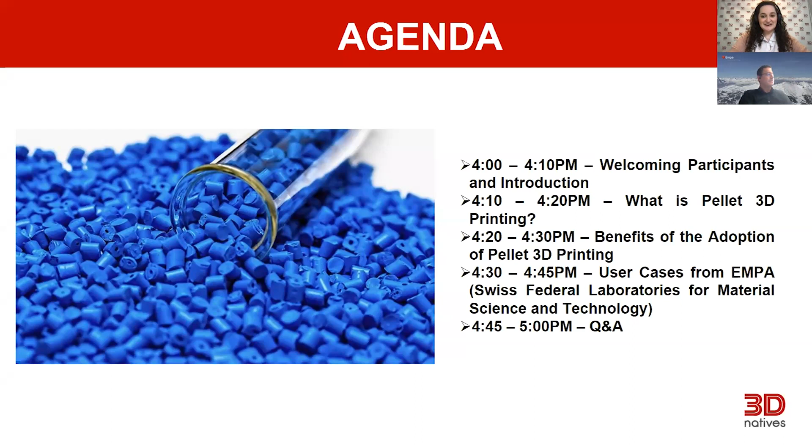So here we have the panelists. First, I would like to introduce you to Mr. Zoltan Mayas, who is an international expansion project manager at Tumaker. He has more than 20 years of frontline B2B business experience in international sales and marketing, and has studied management, sales and marketing at a university level, and he also holds a degree in digital and social media marketing, as well as a master's degree in international business and life coaching. He has created several successful international sales campaigns, developed strategies, and led sales teams. Additionally, he has managed industrialization and sales expansion projects and opened new markets in several countries. Since 2021, he has been in charge of the internationalization of the Tumaker brand as a country manager.

Also from Tumaker, we'll be joined by Dr. Toni Iborra, who is a project manager and materials specialist, who graduated from the University of Valencia with a degree in chemistry, with stays at the University of Manchester in the UK and Pontifical Catholic University of Argentina. He began his research career at the University of Southampton, where he obtained his PhD in chemistry for his research based on materials with photocatalytic properties, and where he also carried out teaching activities. He has presented his work at national and international congresses, including at the University of Oxford and EMRS Strasbourg, as well as published peer-reviewed articles in first quartile scientific journals. He is a lecturer at the Francisco de Vitoria University and professor in chemistry at Florida State University, teaching chemistry 1 and 2, as well as experimental lab. Since 2021, he has led the commercial strategy and positioning of the Nova Spider project at IT3D Group as an expert in the field of material sciences.

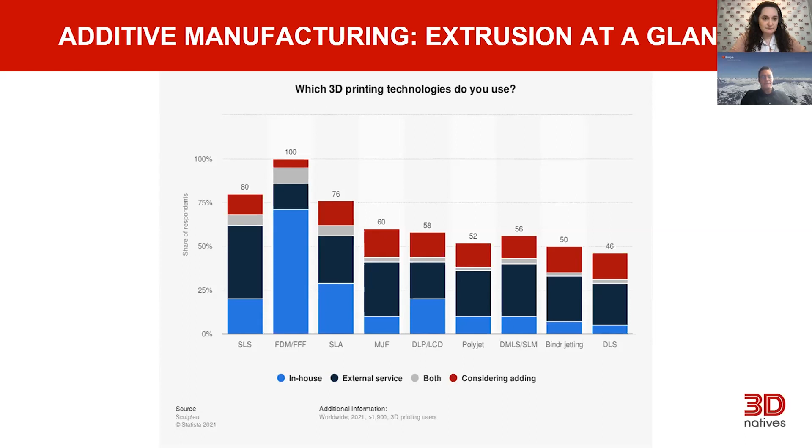But I just wanted to take an opportunity to take a closer look at the processes that are used. For those who don't know, on the graph on the screen you can see the many different processes used in additive manufacturing. By far, one of the most popular are extrusion methods, called FDM and FFF here. There are others that hold the extrusion name, and in this graph from Sculpteo, they showed that the vast majority of companies adopting additive manufacturing are adopting it through extrusion rather than other methods for a number of reasons, including cost and ease of use.

That being said, when you think of these industrial projects, often extrusion isn't what comes to mind. Instead, it is other processes. This is where a technology like pellet 3D printing comes in. Thanks to pellet 3D printing, users would be able to use a wider variety of industrial printing materials at a cheaper cost and faster than with many other methods. This could really help push industrialization in the AM sector, allowing it to become even more securely a method for manufacturing through a variety of fields.

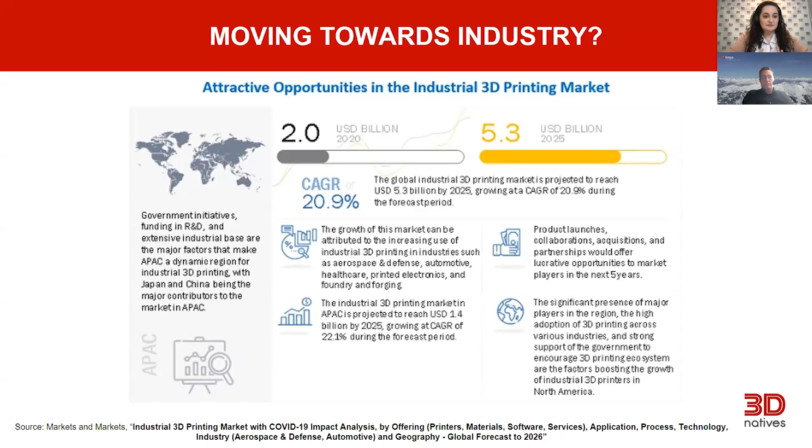Madeleine, thank you very much for the fantastic introduction. I also would like to welcome everybody. I would just cut right in the middle of what we're going to talk about today. I'm looking forward to a nice hour spending together talking about pellet printing.

So, as we saw in your introduction slides, the most popular manufacturing technology is extrusion. So what is pellet printing? Well, it's not very difficult to explain. Pellet printing is when we're printing using pellets. We can call it FGM, fused granulate modeling, or direct extrusion printing.

Something I wanted to say is that every filament starts as a pellet, as filament manufacturers use pellets to make filament. So in essence, printing with pellets is jumping one step in the material chain. Printing using industrial pellets, or almost any type of plastic waste converted to pellets, allows that possibility that no other technology did before.

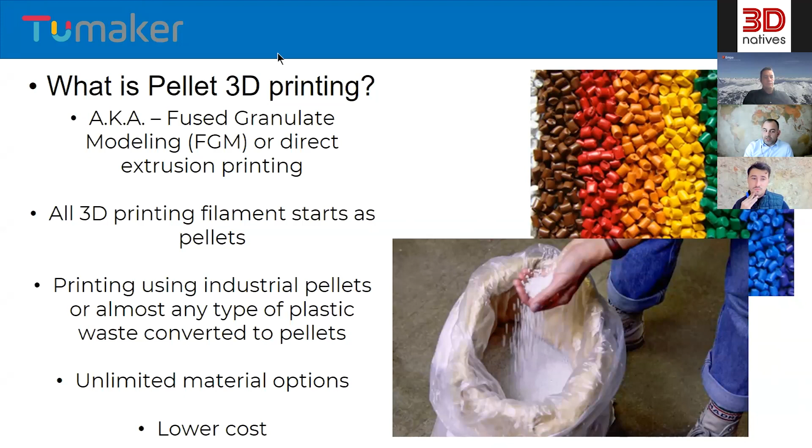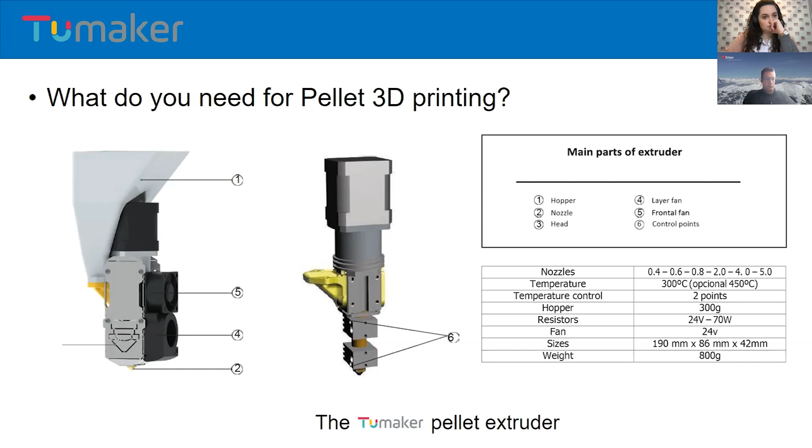Frank will be talking a lot more about extruders, so I would just leave it at that point. A couple of things with Tumaker: the extruders we are fitting to our printers go up to 300, 350, optionally up to 450 Celsius, giving additional possibilities with materials of higher melting points. And obviously these are developed by us and are specific extruders for pellet printing.

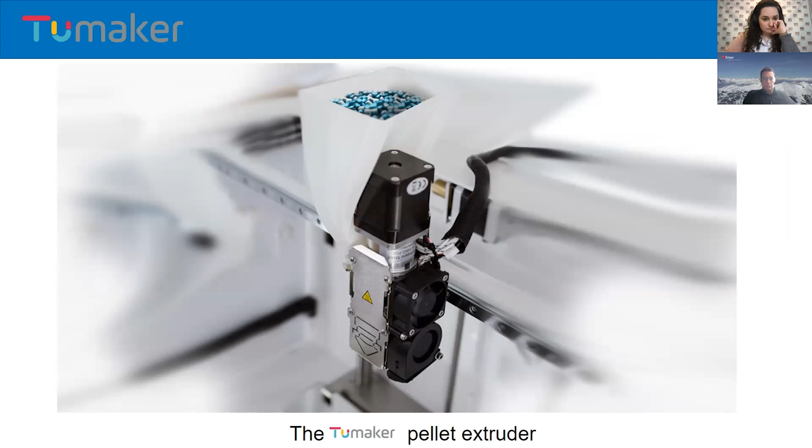So let's move on to the next slide, Frank, if you can. Here's a picture so you can see a pellet extruder in action. Like I mentioned before, there's a pellet hopper on top of the extruder fitted to the 3D printer. Let's move forward - another picture, filling manually the pellets into the extruder while the machine is printing.

So, as I promised, a bit more on reasons - cost and materials using pellet printing - and those were the reasons why Tumaker decided to start focusing on pellet printing. One of the most important, or the first that comes to mind, is the freedom of choice of material. You could use a wide array of materials there, up to 350 degrees. The second would be limitations in the development of new materials.

We work with a lot of customers who want to test and try out new materials. Pellet technology makes that a lot more easy and convenient, and eliminates the need of creating filament from those materials. I also listed advanced technical materials, custom composites, and adding dyes and additive fibers. I'll leave all that to Toni - he knows a lot more than me about this. So we'll see a lot more information in the material section of the webinar.

The fourth point, materials in the filament process can lose or transform part of their properties. That can also be avoided if you directly use the pellet.

Certification on materials, as Toni will mention as well, allows you to work with approved materials for different industries, which is a challenge for many.

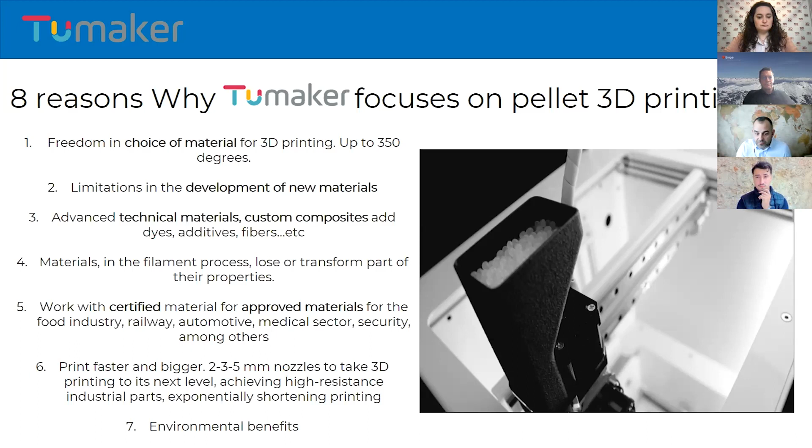The seventh was environmental benefits, as pellet printing makes it easier to use recycled or remanufactured recycled material. It's simply more practical. As you might see, the title says 8 reasons - I have 7, so the 8th went to the next slide because it's slightly important for many.

The cost of printing obviously depends on the material you're using, but it's estimated at 60 to 90% savings on printing cost per kilo, depending on the type of material you use.

Here's a quick comparison, the source from 3DX Tech, comparing PETG and Ultem pellet pricing. I think there's no rocket science here - pellet is lower cost material because we're skipping one step in the process of preparing material to be printed with.

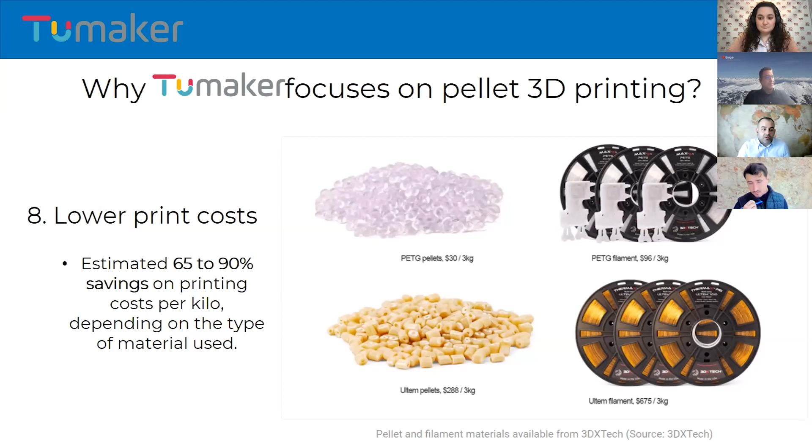So at this point, some of you might be asking, who's Tumaker? I just wanted to give a couple of quick facts about the company. We're building performance-focused industrial-grade 3D printers since 2014, always focusing on prosumer industrial-grade machines. We have in-house manufacturing capabilities in the north of Spain.

We tailor-make size and custom extruder combinations. We work on projects with companies in terms of specific size, specific number of extruders, up to 4, and I'll discuss a bit more about the different head combinations available. We are the first to market with pellet printing technology, bringing it to the desktop aimed at prosumers, and we work with partner training programs and specific solutions for customer needs.

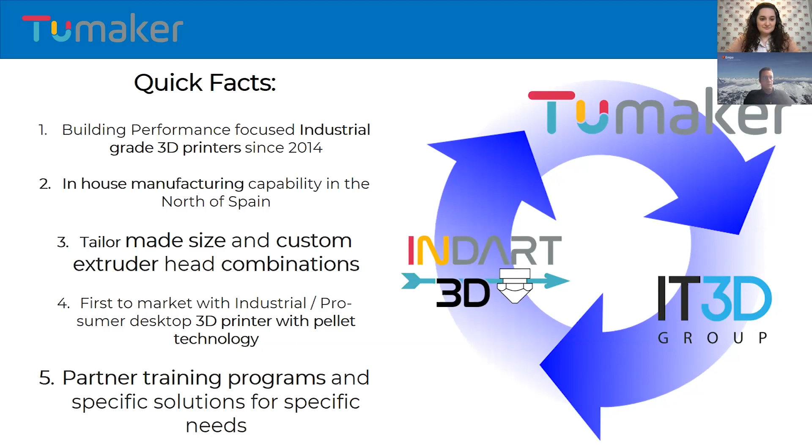The available models: we have the NX, which is the smaller one with a printing volume of 290x180x200. That was the first smallest machine we fitted with pellet extruders.

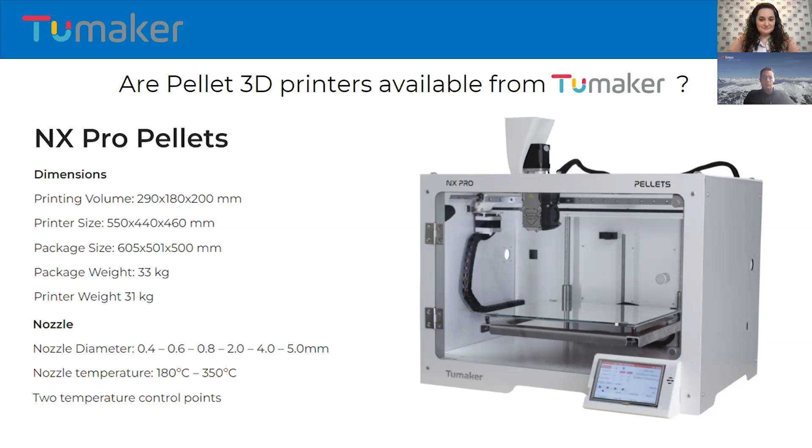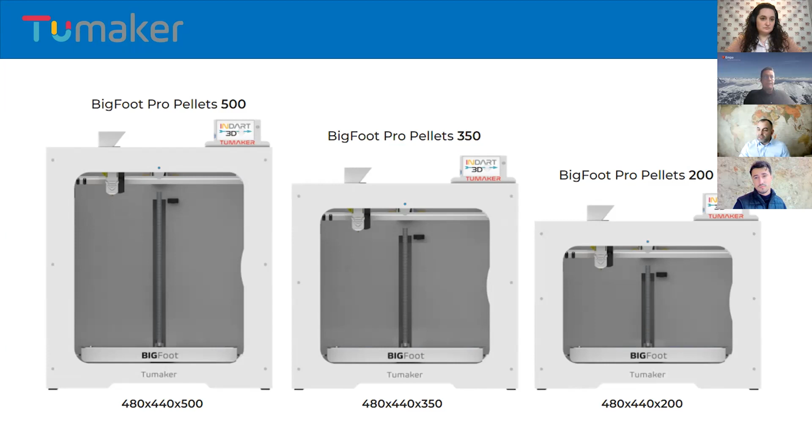Our best-selling range, the Bigfoot range. These are basically different in size - 200, 350, and 500 in terms of height. The mechanics and the build are the same. They are all built with pellet heads. They can be IDEX, independent dual extruder systems. As I mentioned before, we can do custom sizes and custom number of extruder heads fitted on the Bigfoot Pro series. And the possible combinations, which I believe is unique in the sector.

We can combine different extrusion technologies in the same machine between Bowden, direct drive, and pellets. So you could potentially choose a dual extruder where both are pellet, or do direct drive and pellet, which is quite popular, using two different materials - one for support material, one for building materials. Combining these three extrusion technologies, 6 possible mix and match combinations are available in our Bigfoot range.

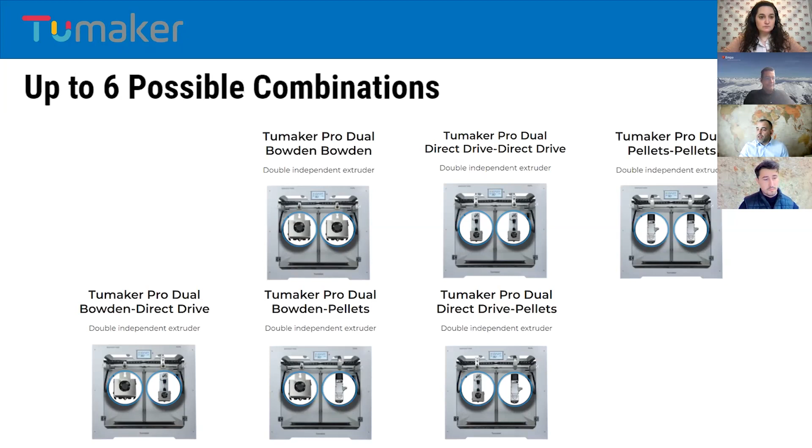So this I think sets the tone for the rest of the panelists on the webinar. They will go into more depth in terms of materials and technology, so I would leave the screen for my colleagues Toni and Frank. Thank you very much.

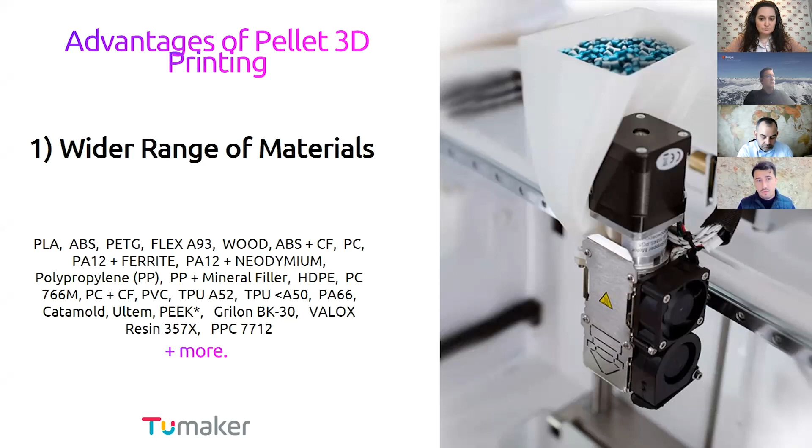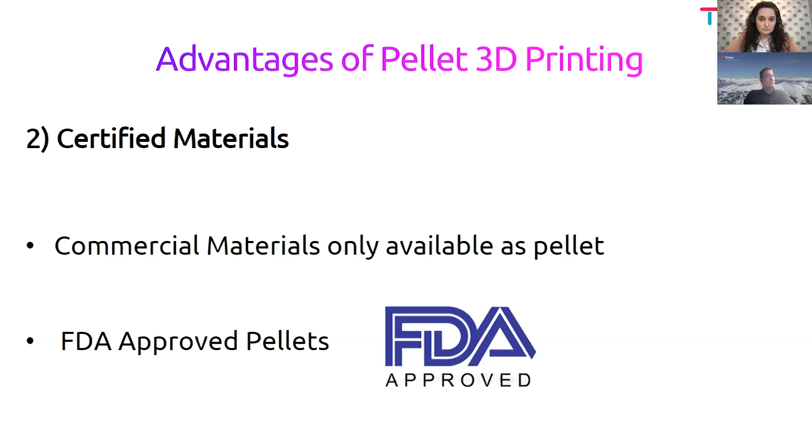Among these pellets, we can highlight certified and also FDA-approved materials for fields such as tissue engineering or the biomedical sectors, where the use of FDA-approved medical grade, biocompatible materials is required, and currently they are only available as pellet.

There is another advantage we can highlight, which is high flow and deposition rate. The pellet feedstock allows for much higher deposition rates, so we can print bigger volumes, bigger parts. However, as the build rate increases, the ability to achieve the desired geometry and in some cases the surface resolution can decrease.

At Tumaker, we typically work with pellet extrusion nozzles ranging from 0.4 millimeters to 5 millimeters in diameter. With large deposition nozzles, large amounts of material can be extruded, allowing for more material output from the extruder and therefore increasing the build rate.

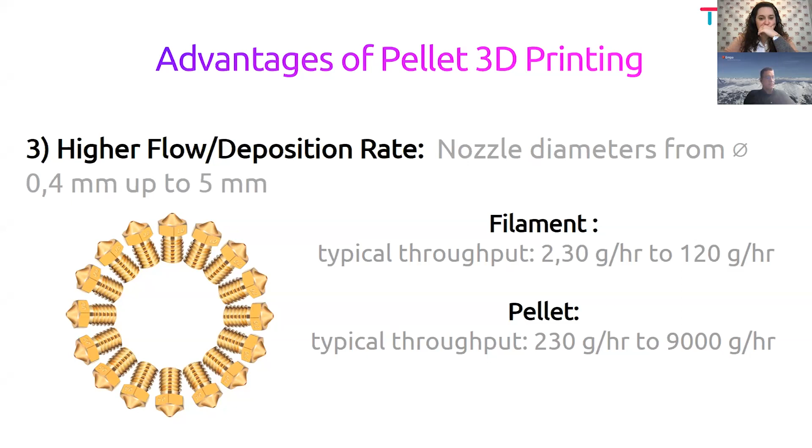Another advantage, probably the main one, is lower printing costs. Both filaments and pellets start out as pellets in 3D printing thermoplastics. Filament materials are made by heating pellets and forming them into filament. Using pellet technology, we skip this process, so we have one less heating cycle, which potentially means the pellet thermoplastic will process easier, perform better, and cost less compared with filament.

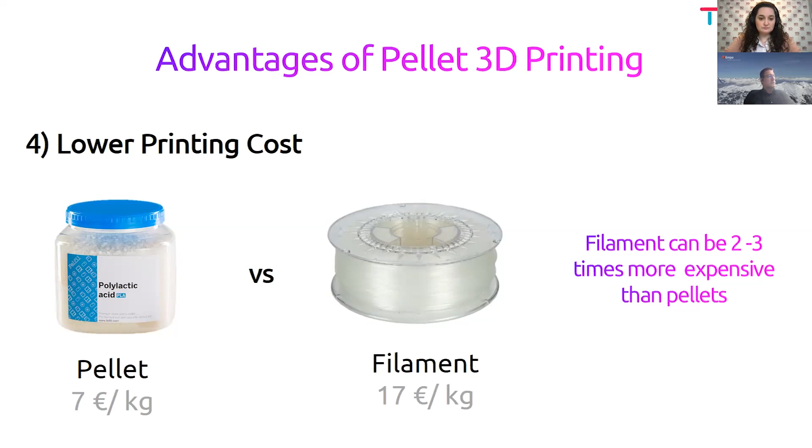Another advantage is bigger prints. Because of the lower throughput and high resolution, filament printing tends to be used more for smaller parts. It's true that bigger parts are also possible using filament 3D printing, but it might not be economical or efficient. On the other side, pellet printing tends to be used for larger parts, bigger volumes that can benefit from its faster throughput.

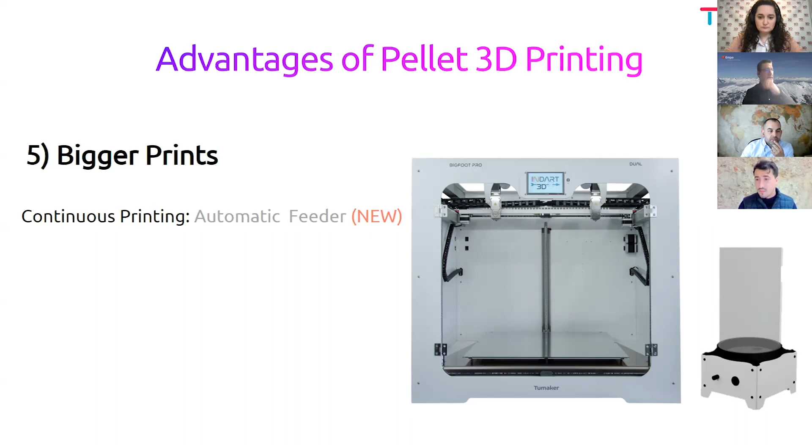Additionally, during filament 3D printing, we always have to make this technical step of changing the coil. This is something we can avoid using pellet extrusion because we have an automatic feeder that is continuously feeding the pellet extruder.

Another advantage is that we can have multi-material 3D printers. We can combine up to 4 different independent heads, combining pellet extruders with the incorporation of bowden and or direct drive heads, allowing for the combination of pellet extrusion with filament extrusion.

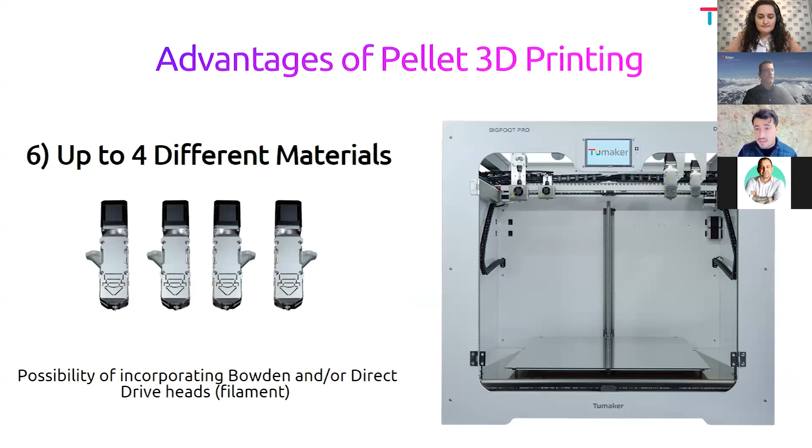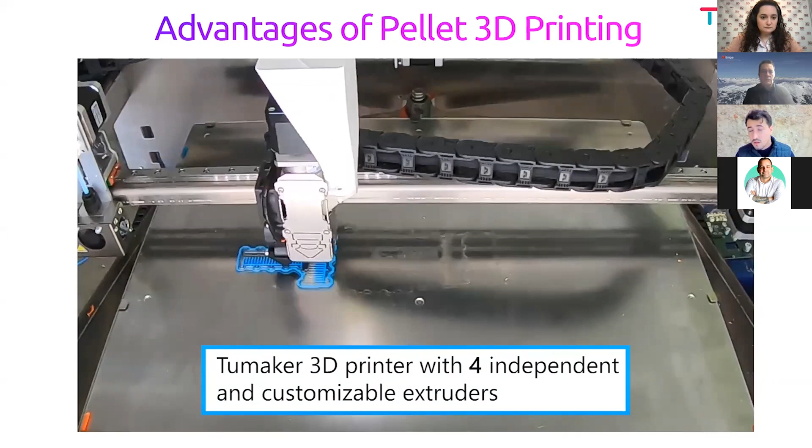In the next video, we'll see one of our machines working. This one contains 4 extruders, 2 of them pellet and 2 of them filament. The first one prints the outer part of the structure using filament 3D printing. Then that same structure is filled using a pellet extruder with a different polymer at a different temperature. Then the same head prints a second structure's outer part, and another pellet extruder deposits a different material compared to the other one.

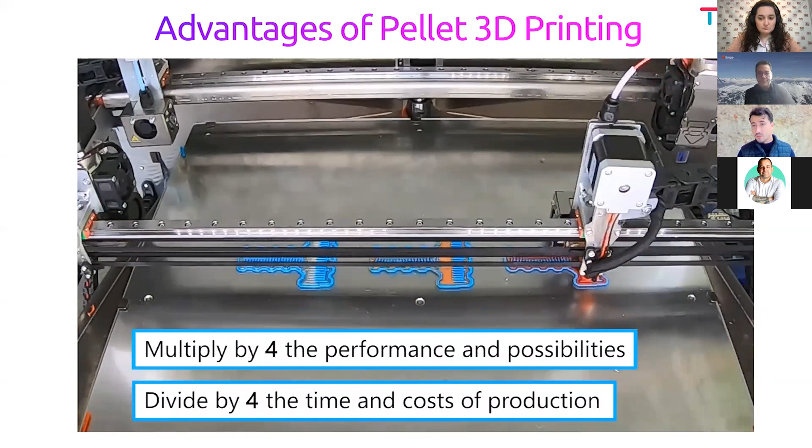Finally, a third structure is printed, the outer part always with the same blue polymer, and then it's filled with another filament. So we have 4 different materials, 4 different extruders, and 4 different temperatures.

So which sectors can benefit from this pellet technology? We have the biomedical sector, tissue engineering, drug delivery, and energy storage.

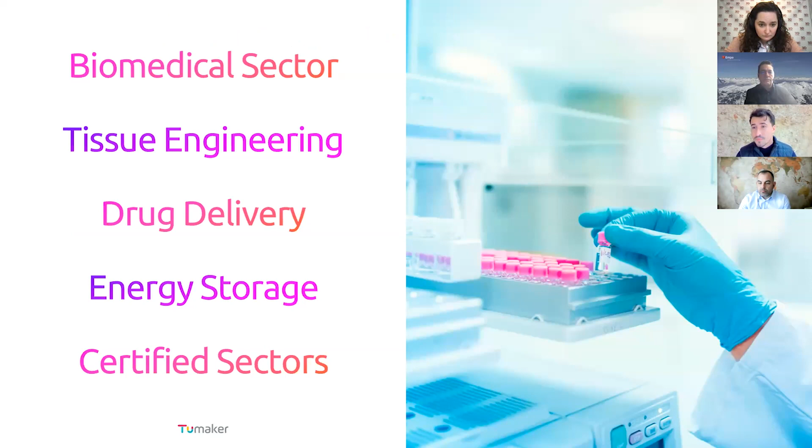We also have certified sectors, as well as railway, mechanical engineering, prototyping, and automotive and aerospace.

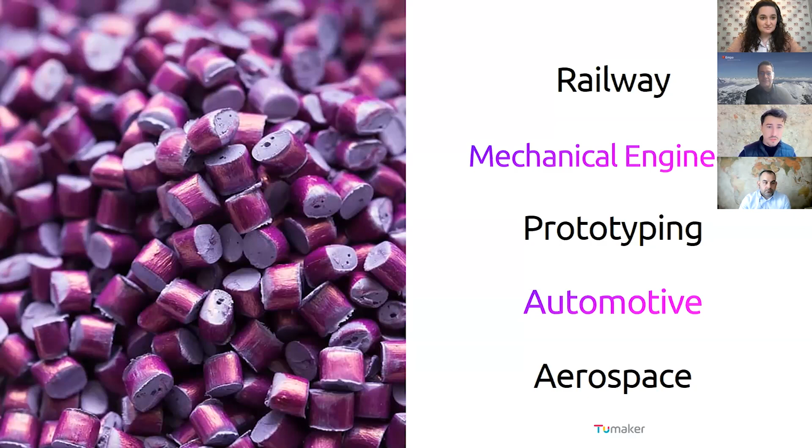As previously mentioned, for the biomedical sector, medical grade FDA-approved polymers such as polycaprolactone or polylactic acid are required. This can be used to fabricate scaffolds using different blends that contain active biomolecules such as antibiotics, in order to treat different pathologies or infections.

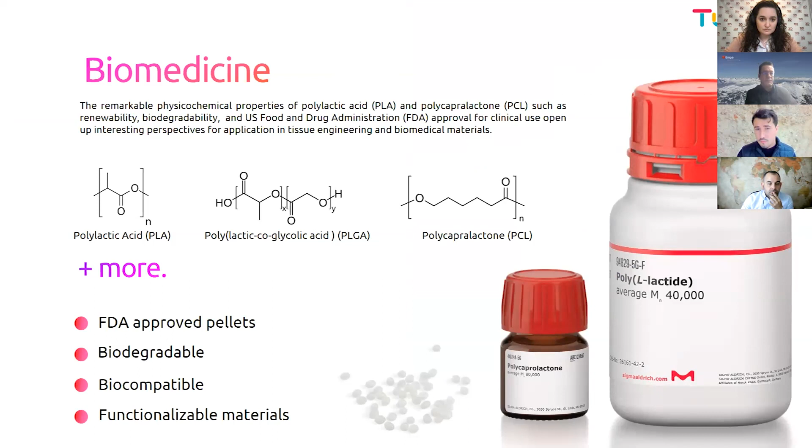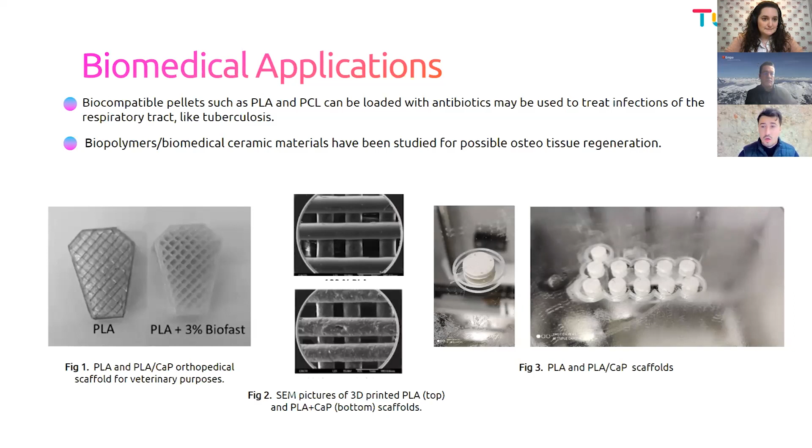Also for the mechanical engineering field and prototyping, the validated pellets include many performance-matched grades to provide application-specific property profiles. For example, Valox pellets, PBT plus polycarbonate, combine heat and chemical resistance as well as outstanding electrical properties.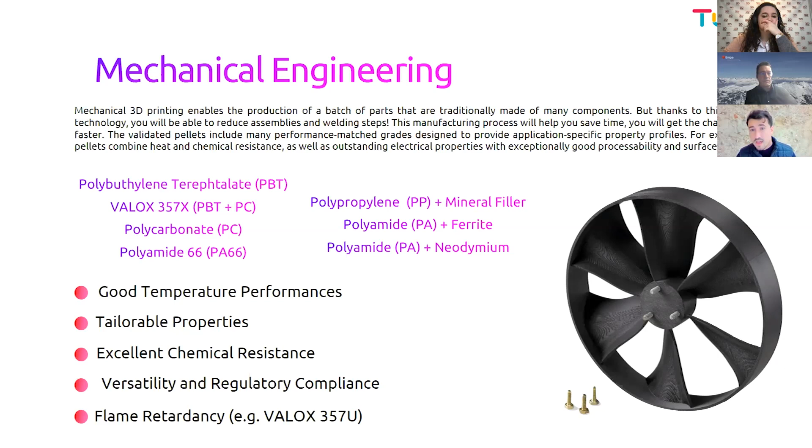Other fields that can benefit from pellet technology include prosthetics, which can be made using polymers that are functionalized and can have antimicrobial properties, such as silver or copper nanoparticles.

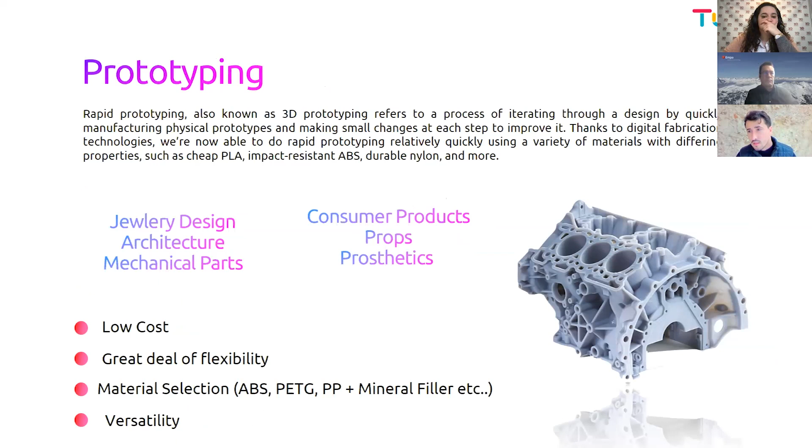The customer or researcher can fabricate their own custom material blends by combining different pellets. You can easily add dyes, additives, or reinforcement fibers to the mix to create custom-made composites.

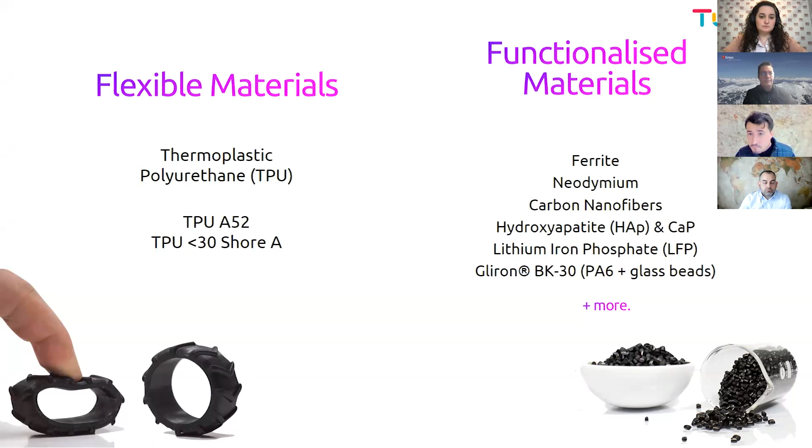Another interesting sector, which Dr. Clemens will also go into detail on, is that we can use pellets loaded with a relatively high percentage of ceramic materials or metals. This can be extruded to obtain ceramic and metallic structures after post-processing, which basically consists of removing the organic matrix and sintering, which leads to the corresponding ceramic oxide or metal.

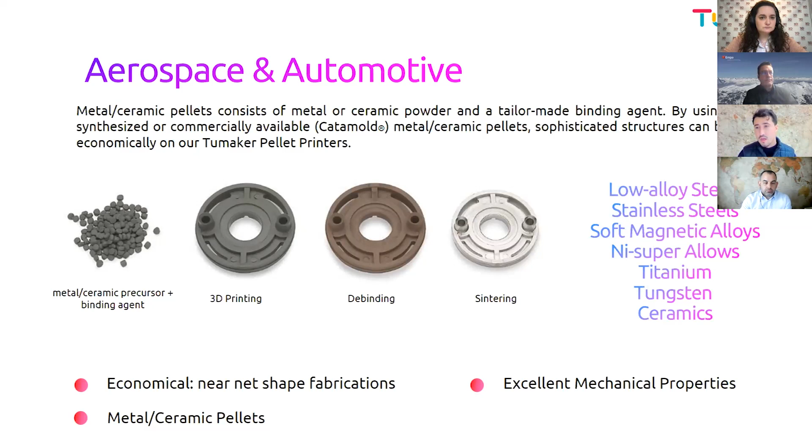So that covers all the advantages of pellet printing for some applications. Thank you very much for joining us.

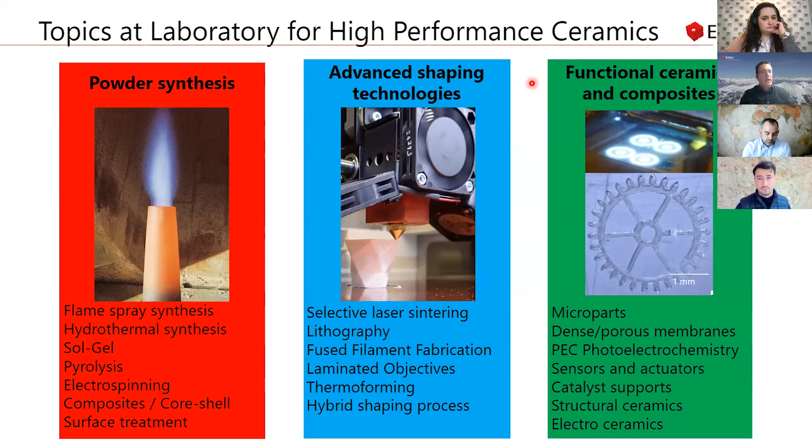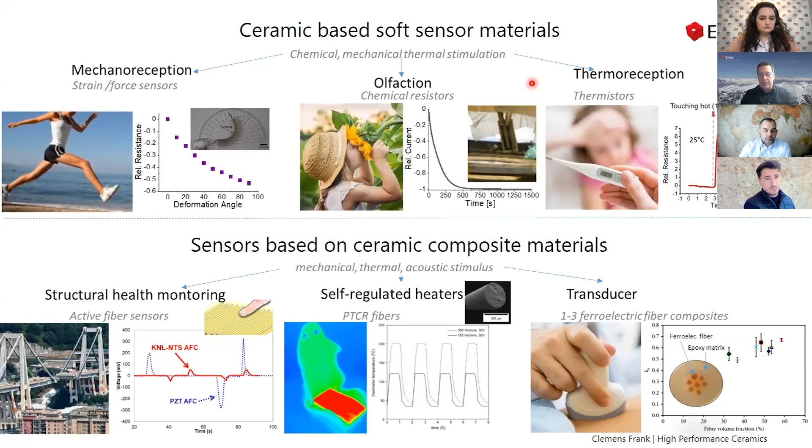My group is split into two parts. On one hand, my group is developing soft sensors based on an elastomer, where we include inorganic fillers which give functionality inside the elastomeric matrix. The second part is that we work on ceramic sensors, which we can use for example for structural health monitoring, self-regulating heaters, or transducers.

Let me now start about the screw extruder for material extrusion additive manufacturing and where we see the advantages. First, material extrusion additive manufacturing, as it's called nowadays—some of you know it also as fused deposition modeling or fused filament fabrication.

We can typically work with four types of different extruder heads. One extruder head is based on air pressure or a syringe, where we press a paste through a nozzle, building up layer by layer to construct our 3D model or 3D object.

The other possibility, if I'm not using a paste but more of a thermoplastic, is to use a so-called Bowden extruder. This Bowden extruder typically has the gears at a different place from the printing head. This makes the printing head lighter, allowing faster and more precise printing. However, the filament has to go through a polymer tube before entering the printing head, which can sometimes be a problem when working with very soft materials.

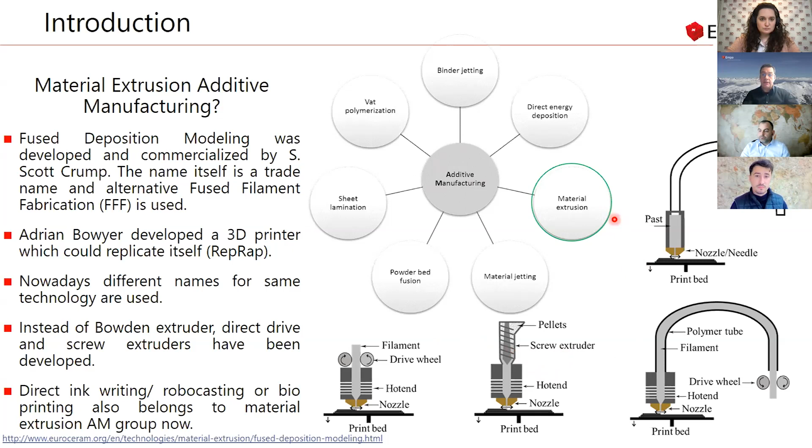So very often the question is, which technology is the right one to use for different materials? Here is an overview of the 4 different printing heads and their main advantages. For the pellet extruder, the main advantage is when you want to work with high printing speeds.

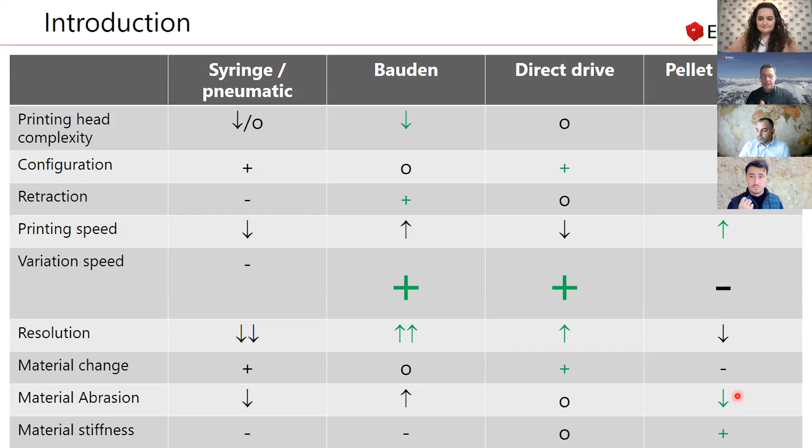Also when we talk about material abrasion, and when you have materials with very low stiffness, for example elastomers. When I'm talking about material abrasion, this means that when you have a very brittle filament, the gears normally rupture your filament, and this is called material abrasion on the filament.

So here you see a view of a screw extruder where you see the hopper, and the screw, which brings the material through the nozzle where then the material goes through.

The idea the people had when developing this kind of system was to mimic what has already been explored for multi-component injection molding processes, where for example you can print toothbrushes with soft parts and rigid parts already together. Typically those devices are printed in one shot, so you can combine soft and hard materials.

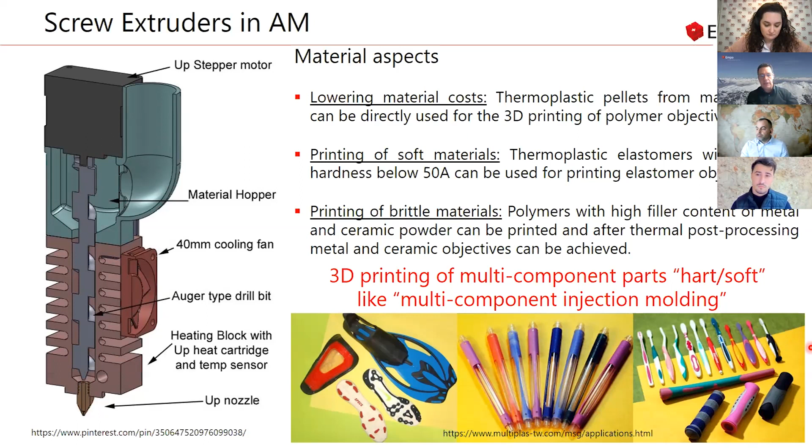It was already mentioned that there are other advantages. What I would like to show now is two cases where we see that the screw extruder has really high potential, and we can use it to further develop new structures and new parts using this kind of technology.

So the first case I'd like to look at is soft materials. As the name says, these materials are soft and have high flexibility. Unfortunately, they also have a high Poisson ratio, close to 0.5, which means that when I push from the top, the material tends to bulge.

By this, for example, it will block directly inside the Bowden extruder. Another problem is when you work with a direct drive and push from the top, you get this kind of buckling. The stiffness isn't enough to really transfer the load needed from the filament, which has to work like a piston pushing the material through the hot end. These are the main reasons why filament printers have a huge limitation here, and that's why the screw extruder can take over these materials.

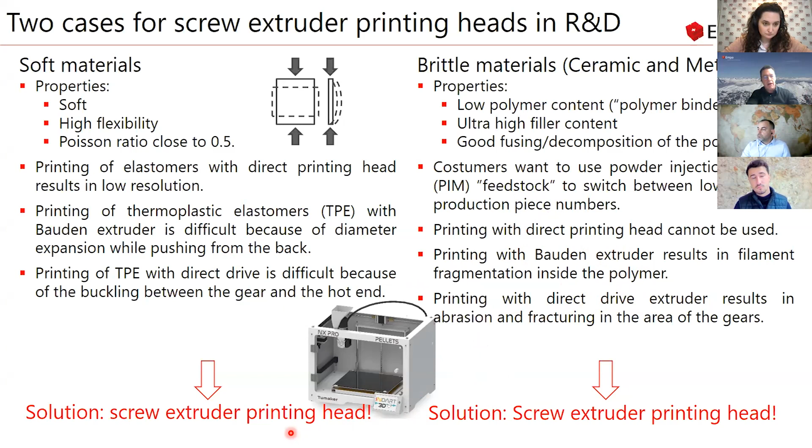With a direct printing head, this clearly cannot be used. Same with a Bowden extruder, and also with a direct drive extruder, the problem is that these materials are typically so brittle that they will fracture or have high abrasion at the area where we have the gears. So these are two material classes where a screw extruder printing head makes sense from our perspective, and where we already use these materials.

Here you can see a little bit of the work we've already done in the last years. This is, for example, a pellet extruder we have here. With this pellet extruder, we first printed some discs. You can see here the bottom layer, which is quite smooth, while the top layer is a little bit rougher.

We used 4 different binder systems and made a ceramic feedstock out of it. You can see that 2 of them were able to print. The other 2 have more waxes inside, so when we start to print with these print heads, we get a phase separation and the waxes separate from the feedstock. However, interesting results came from these 2 feedstocks which we made ourselves with a commercial injection molding binder system.

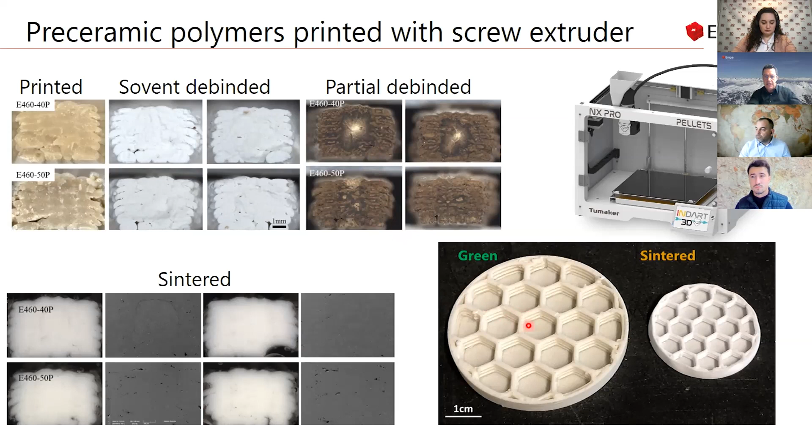Here you can already see some ceramic parts that have been printed successfully for different applications. You see some small parts, parts for the watch industry, and implants that were printed. You can see they were printed with a support material, and you can also see that you can print very large structures based on this additive manufacturing technology.

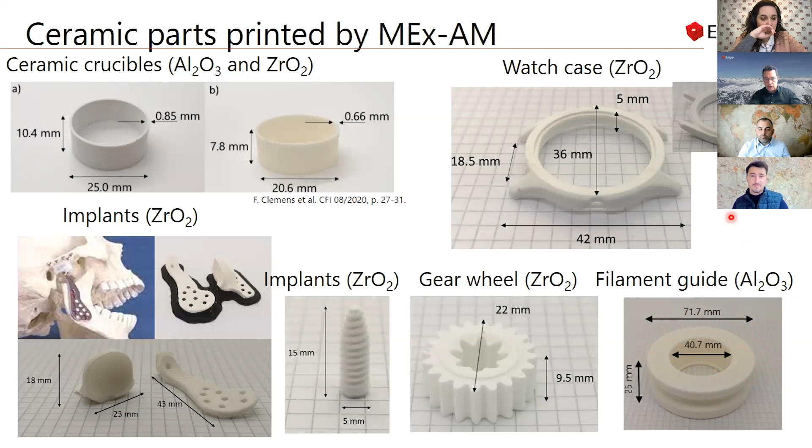We published this already last year in Extruders, where we also introduced a sensor inside. With these multi-material printing heads available nowadays, you can already integrate sensor materials inside. That means you can go one step further and print chemoresistive, thermoresistive, or mechanoresistive materials onto soft materials, and investigate the deformation of the structure or its temperature.

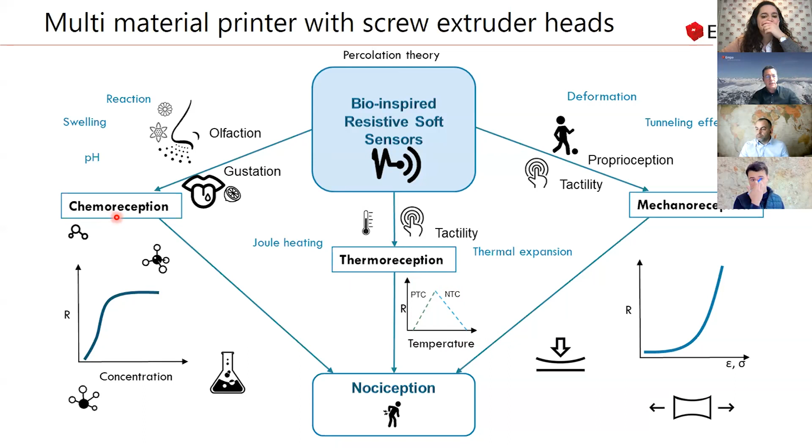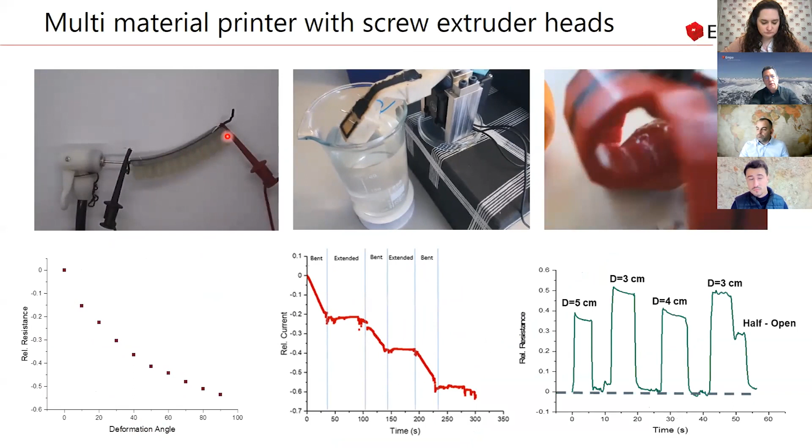This is what I would like to show you here inside these three videos. So you see here one example for this pneumatic actuator, where you see that resistance changed by changing the deformation angle, which you can measure with this special piezoresistive strain sensor on top of it.

The other possibility is that you can measure, for example, here the solvent. That means you measure the vapor of the solvent, which is above the liquid. And you see when we bend it and extend it, then we bend it and extend it, you see that the current always goes down because the concentration above this liquid increases over time.

But you can really nicely see that when we always go close to the surface of the liquid, we always have a huge decrease of the current, which means we can detect nicely the chemical species inside.

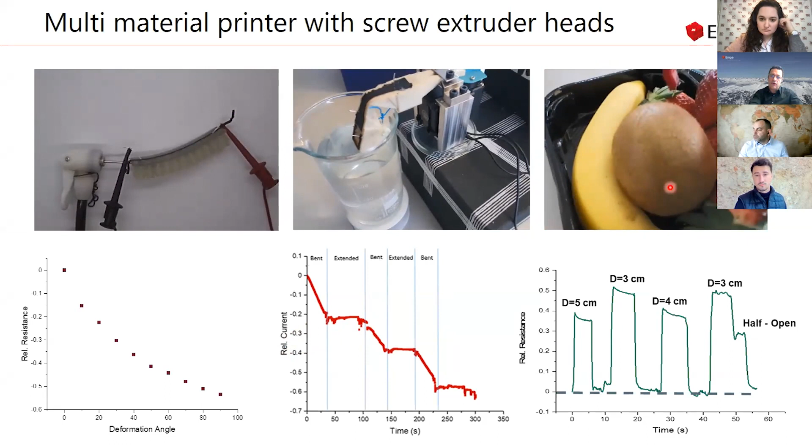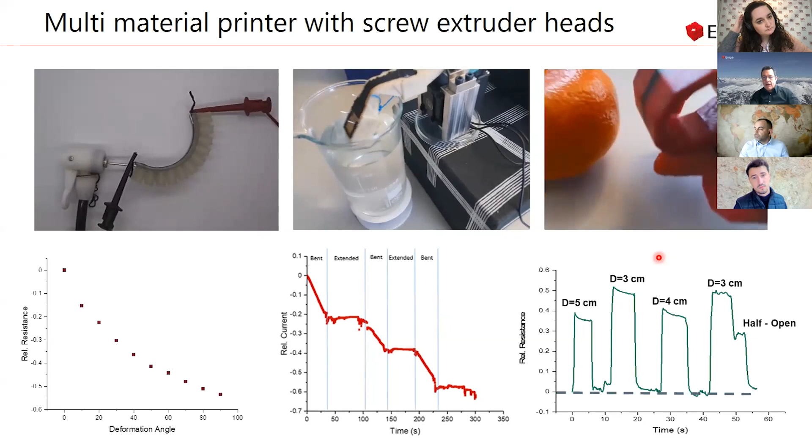And the last video, which you can see here, are these kind of soft grippers for fruit. You can see that by these strain sensors, which are printed on the side of these grippers, you can detect different sizes. So when you have different fruits, you can really select them and place them at different places. These are the applications which you can do with this kind of new technology which is now available.

So let me conclude my part with it. I wanted to show you that you should now use not anymore the words FDM and FFF. You should talk about material extrusion additive manufacturing.

And there is also the screw extruder printing heads, which belongs to this additive manufacturing platform. The interesting part with the screw extruder printing heads is that you can print materials that are not able to be printed with other kinds of printing heads. One example I tried to explain is the commercial ceramic injection molding feedstocks, which you can nicely print with this kind of screw extruders.

However, take into account you cannot use all kinds of ceramic injection molding feedstocks or metal injection molding feedstocks. So you have to look a little bit at what is their composition, because fusing you need anyhow during the printing process. Therefore waxes might be a little bit of a problem as far as we see at the moment.

So another part which I showed you are the soft materials, and this is really a big challenge which I see, because I have not seen so many printers which are able to print a shore hardness below 20A, and I only can see that these can be done by these kinds of screw extruder printing heads, where we have the possibility to even go lower.

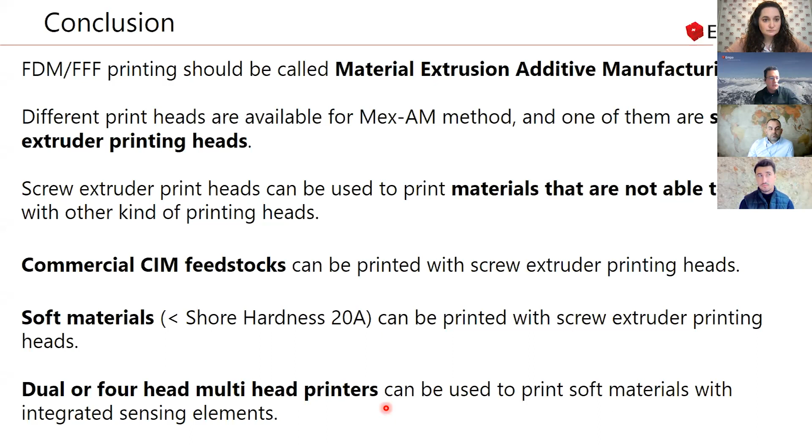Finally, the nice thing is that we have now also the possibility of dual or 4-head multi-printing. That means we can integrate soft materials, we can integrate sensors, plus we have the possibility that we can also print support material, and therefore we can really make very complex structures for soft robotics, medical, implants, or prosthesis, or any kind of other applications which are a little bit more complex than this.

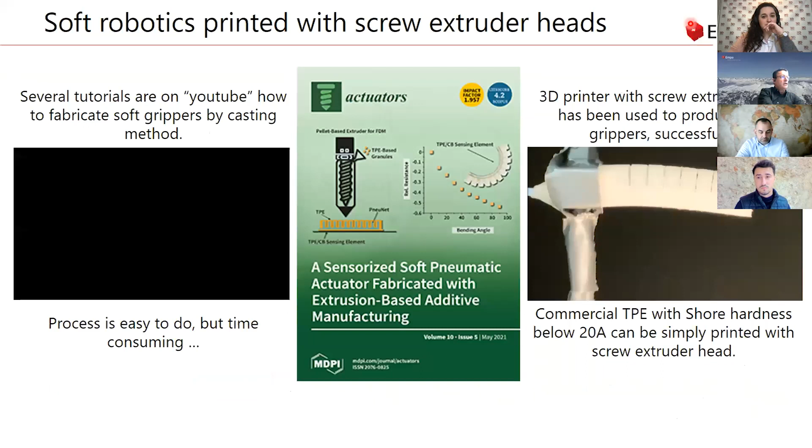But this is something where we believe - probably you saw this before, let me go back to my slide to answer. You can still see here the different layers after the thermal debinding process, and we believe this is currently a problem. So the fusing of the polymers is the problem, not the process itself. But we still have to further prove this.

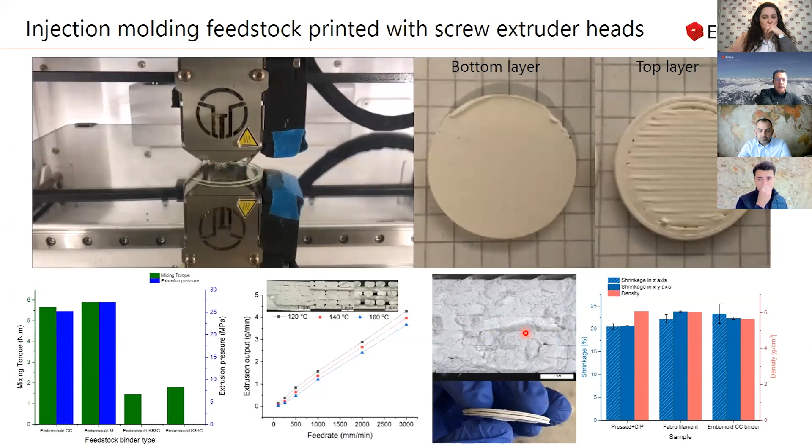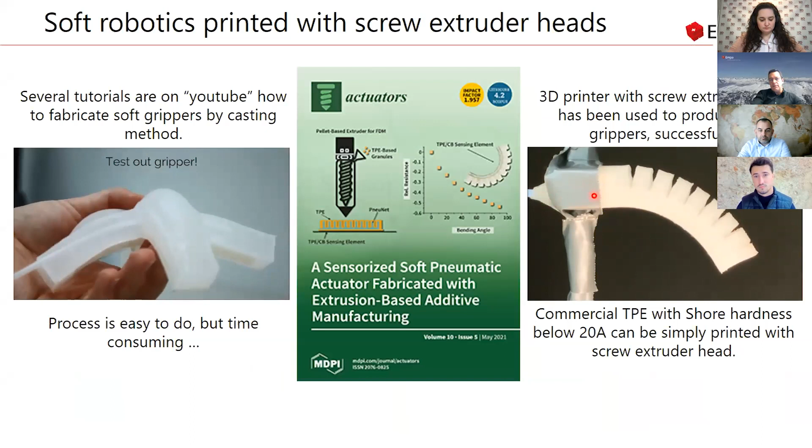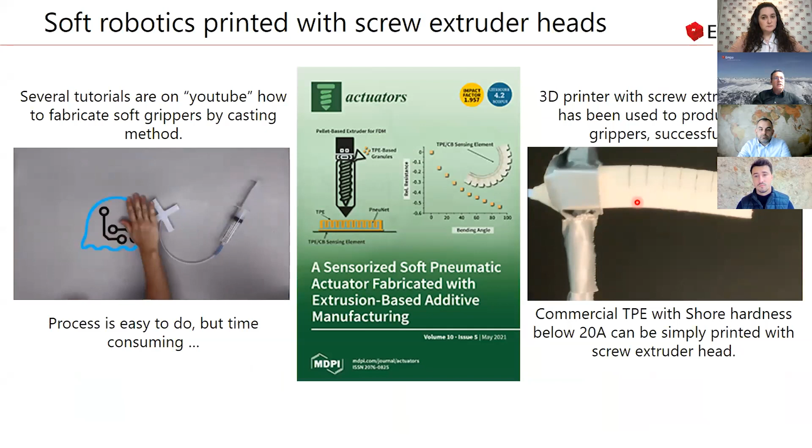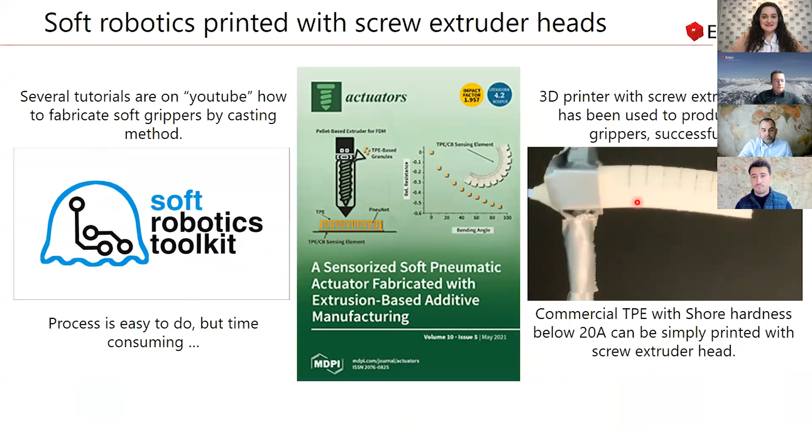Great, thank you very much. Next question that gained popularity, for anyone who would like to answer: is it possible to print PEEK using pellets? Okay, so with our printers, it is true that we have started to use PEEK. However, it is limited to small parts.

We are not able to print PEEK at bigger volumes, because we would require chamber temperature conditions within the chamber. So we have worked with small parts for tensile testing, but we are not getting the results for big parts.

Makes sense. It's a challenging material overall in extrusion and other methods as well. We are working on it though. Well, we'll wait to see, shall we?

A next question for Toni would be, in biomedical applications, what material would you say is the most used, and would it be FDA approved? I will say PCL. PCL and PLA are both quite used, FDA approved materials. They are biocompatible and biodegradable.

Another question is, does the printer by Tumaker allow mixing master batches or the incorporation of plastic waste? Yes, this depends on the form of that plastic waste. We need to go into details again and see the diameter of those particles. But we have clients who have explored this, and we consider at Tumaker that this is something interesting.